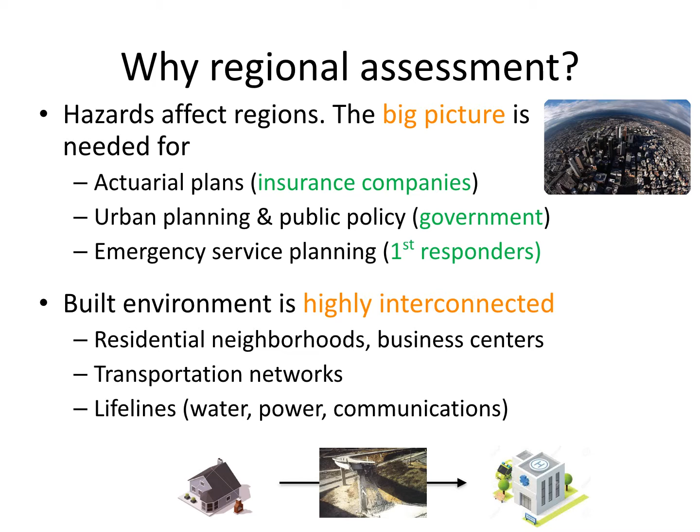Now that we've established the need for regional assessment, let us identify the challenges. The first class of challenges involve harvesting of data and the conversion of data to metadata and eventually into analysis models. This is a challenging task because sample population is diverse. In other words, not all bridges and buildings are the same. And this diversity requires the use of sophisticated and as of yet non-existent data harvesting tools. Another challenge is that access to detailed data may not be possible. This would then require estimation of missing data through techniques such as machine learning.

Finally, processing of harvested data and analyzing the resulting models require large computational resources. It is fair to state that regional PBSA studies will break computational records among civil engineering applications. The subsequent challenge involves transforming the models into decision variables such as economic loss estimates, downtime and repair costs, and insurance premiums. The challenges in this area include the necessity to use heterogeneous analysis tools and to link them.

In the present context, these tools include OpenSees for nonlinear structural analyses of models, OpenSHA to estimate the hazards, and FEMA's Performance Assessment Calculation Tool, PACT, to estimate the economic losses. New methodologies need to be brought in, including data analytics and Bayesian inference methods, to organize and make sense of the output of the analyses over the extremely large metadata sets.

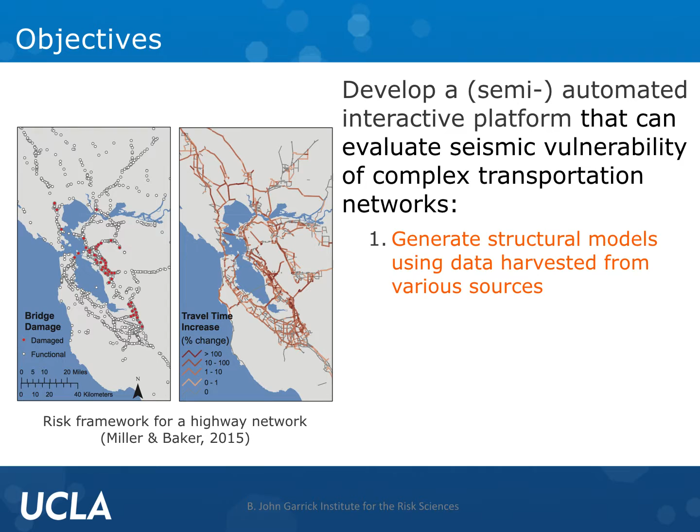Given the motivation and challenges cited before, the objective of the present effort is to develop a semi-automated interactive platform that can evaluate the seismic vulnerability of complex transportation networks. There are three distinct threads of features that such a platform should have. One, it has to be able to generate structural models. Two, it has to be able to carry site and structure-specific seismic analyses. And three, it has to be able to evaluate the consequent economic losses at the network level.

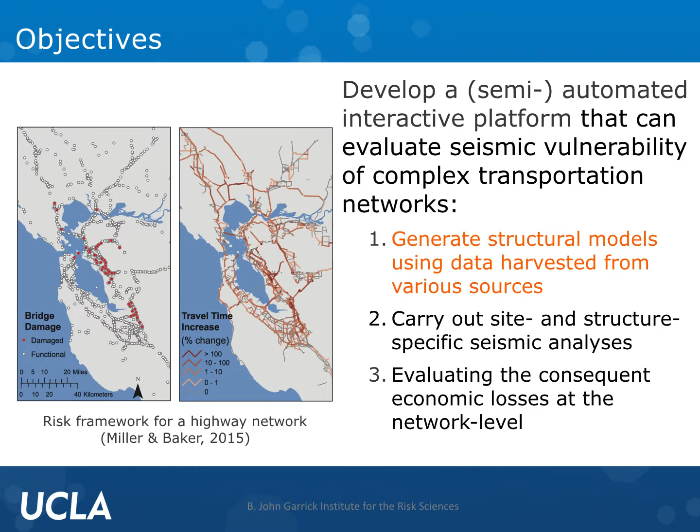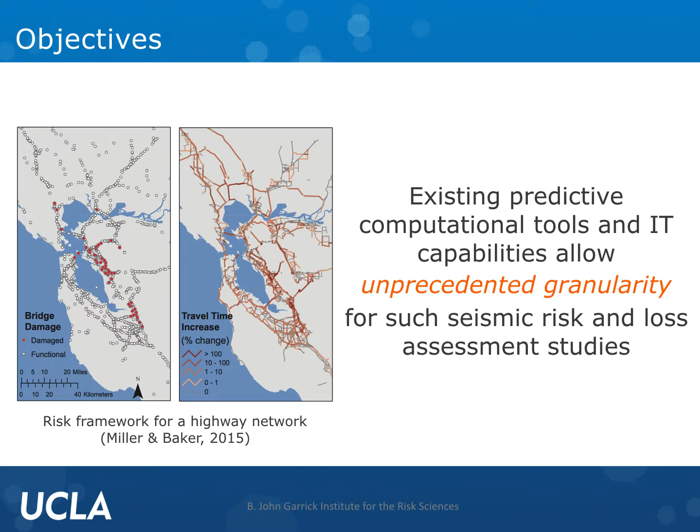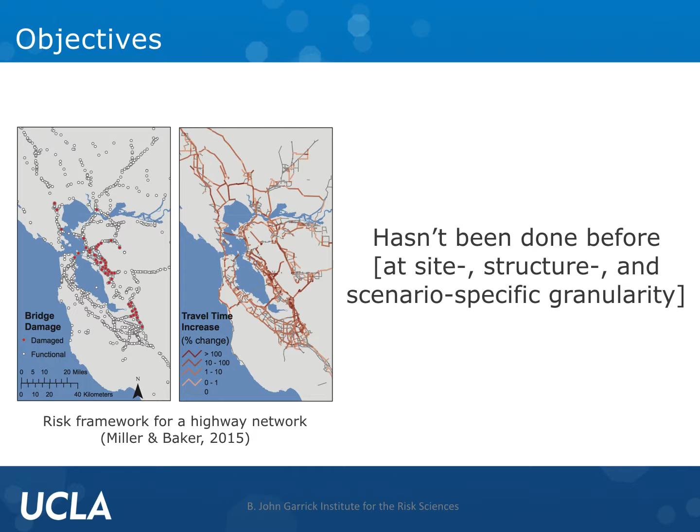Existing predictive computational tools and IT capabilities do allow unprecedented granularity for such seismic and loss assessment studies. Yes, the technologies and tools exist, and a few attempts have been made towards this goal, such as the study by Miller and Baker shown here on the left. However, the type of regional PBSA that we're aiming in our study, which features site, structure, and scenario-specific granularity, has not been achieved, nor even attempted before.

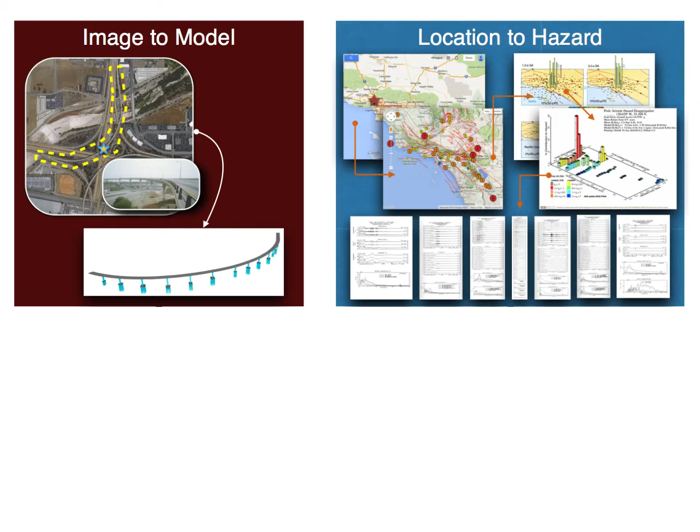So what is our vision and what is our scope? Here's a graphical illustration of the envisioned workflow for our regional PBSA methodology. We begin by developing an analysis model of a given bridge, for example, using images. We then devise a suite of representative ground motions for the specific site of our bridge.

We use the model and the ground motions in nonlinear time history analyses in order to develop a statistical picture of the potential outcomes in the form of, for example, fragility curves. These fragility curves can then be used to estimate the decision variables for assessment, such as economic losses, downtime, repair and retrofit costs, or insurance premiums.

We plan to carry out this workflow through a regional PBSA computational platform we're currently developing with my students at UCLA. The toolbox contains a module that harvests raw data, including images, from public databases and users, and converts them into metadata. These metadata are then stored and organized in a relational database.

Using the metadata, it is possible to create analysis models, and the analyses are carried out using several publicly available tools. OpenSHA is used to compile site-specific ground motions from databases such as PEER NGA-West2. OpenSees is used for carrying out the nonlinear time history analyses which yield the fragilities. And FEMA P-58 PACT is used to estimate the losses.

Once the site and structure-specific results are computed, they are committed back to the relational database so that they can be accessed by users, and also they can be used to learn about the common behavior of subclasses of bridges and components. This learning process can be used to eliminate unrealistic and non-physical results, and also to devise automated metadata for yet-to-be modeled new bridges for which only a few pieces of information are known, such as structure type, number of spans, and year built.

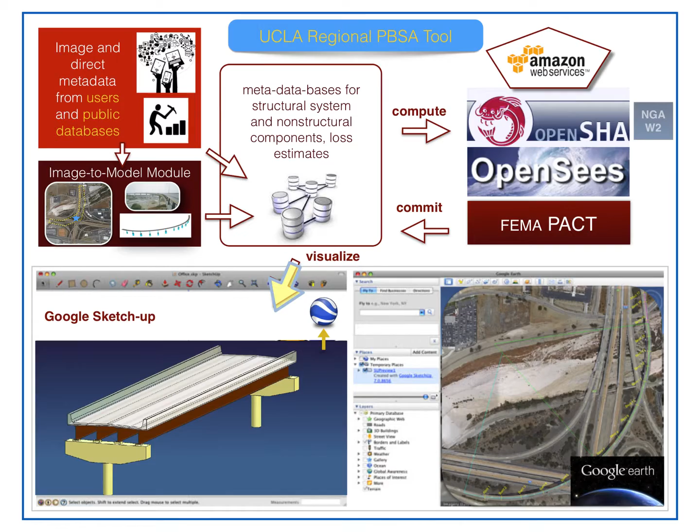Here are some of the details of the envisioned components for our PBSA framework. Let us begin by describing the image to model module. Let us in fact emphasize the fact that we will not only use images, but any viable available data to create the models required for our analysis.

So where will these data come from? A good portion of the data required to devise bridge models for analysis will come from databases. One such major database is the National Bridge Inventory, which is compiled by the Federal Highway Administration. This database provides metadata such as year built, construction type, and materials used for all bridges and tunnels in the United States. Its primary intent is to bookkeep bridge conditions.

Another major database is the Caltrans Bridge Database, which is compiled and maintained by the California Department of Transportation. It provides all details of bridges, including foundation configurations. This database contains mostly analog data in the form of structural drawings, and thus it cannot be interrogated automatically at the present time. Nevertheless, it can be used with permission from Caltrans to validate and categorize image-based models.

Another source is the California Strong Motion Instrumentation Program CSMIP database, which is maintained by the California Geological Survey. It provides structural and foundation details of 72 bridges in California. This database can be interrogated online, and it contains bridge response data from past earthquakes, which can be used for model validation. In our study thus far, we have already created computer codes that automatically extract all available information from the NBI and CSMIP databases.

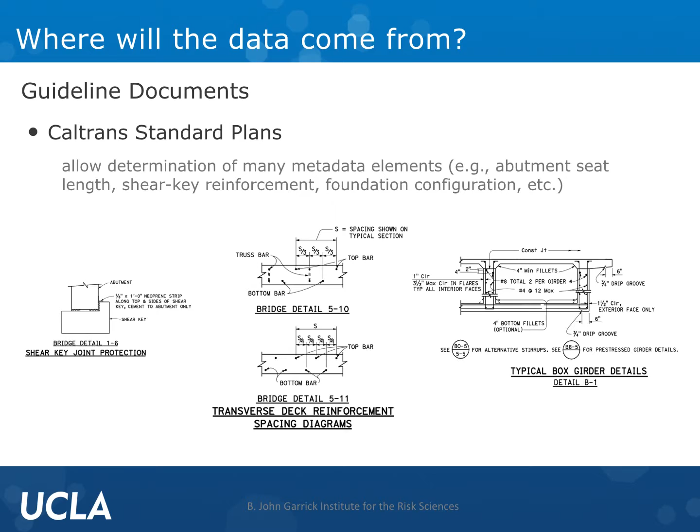Some of the data will come from existing guideline documents. Caltrans standard plans allow accurate estimation of several metadata elements, such as abutment seat length, shear key reinforcement details, box girder details, and foundation configurations, by using other harvested data such as number of spans, number of lanes, and year built. Our master's and PhD students are currently making progress on developing data mapping systems to estimate unknown metadata based on priors and data dependency rules that we're extracting from Caltrans standard plans.

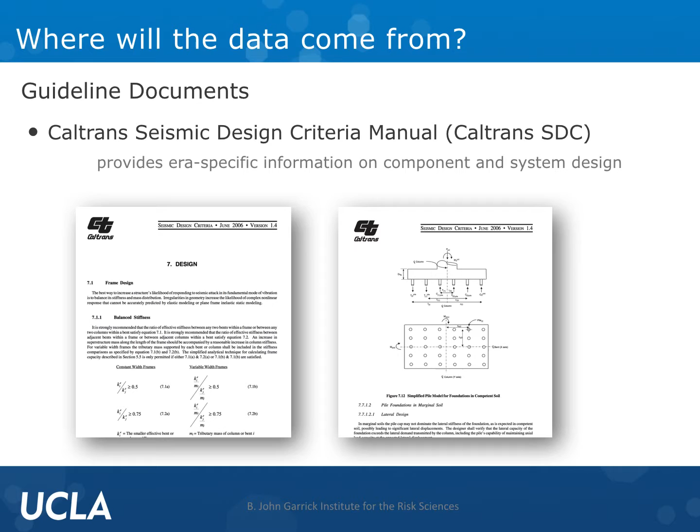Another similar and important source is the Caltrans Seismic Design Criteria Manual, or Caltrans SDC for short, which provides era-specific information on component as well as system design. Again, it is possible to extract metadata rules from Caltrans SDC and accurately estimate, for example, the column reinforcement ratios from other harvested data such as location, year built, number of spans, and number of columns.

A major source of our data will be the internet, and the primary providers of these data will be the navigation and GIS tools such as Google Maps, Google Earth, and MapQuest. All of these applications can be interrogated online to extract images as well as topographic data. I will describe how we use these databases to develop our geometry models later.

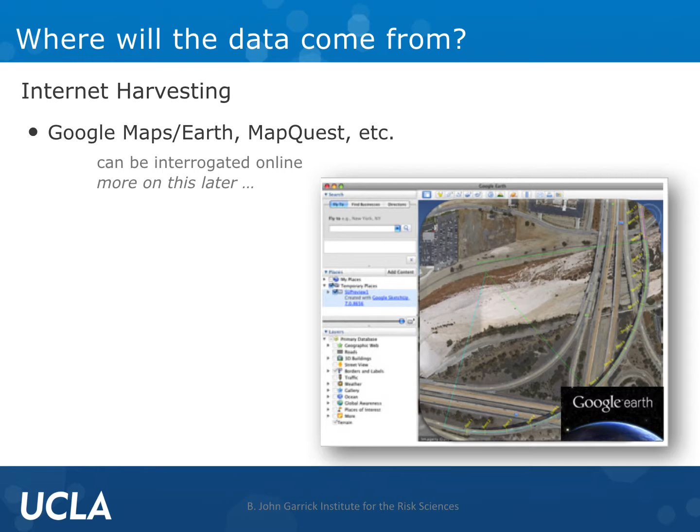Another major source of data will be the general public, i.e. the users and viewers of our regional PBSA tool. We will use crowdsourcing techniques to extract information when it is simply too difficult to devise a computer algorithm to do the same job. To increase the reliability of crowdsourced data, we're developing a Wikipedia-style interface for our data contributors. The collected data will be reviewed by referees whenever possible, as well as machine learning algorithms to eliminate nonsensical entries.

Here's an example of how crowdsourcing can be used. We can show a user what a typical seat-type abutment looks like. We then provide the user a photograph that shows the abutment of a particular bridge and ask if the user thinks that this is a seat-type abutment or an integral one.

Let us now move on to the specifics of how images can be processed. Development of an image-based model begins with locating a bridge and marking its abutments. We do this by a combination of automated and crowdsourced methods. We start by reading the approximate bridge coordinates from NBI. We then extract a satellite image of the location corresponding to the approximate bridge coordinates.

We run a road extraction algorithm to detect roads on the selected image, and then generate random points on detected continuous road lines and pass the coordinates to the Google Roads API. We then cross-check road inventory with NBI and then highlight the relevant road line. We then prompt the user to mark the beginning and end points of the bridge abutments.

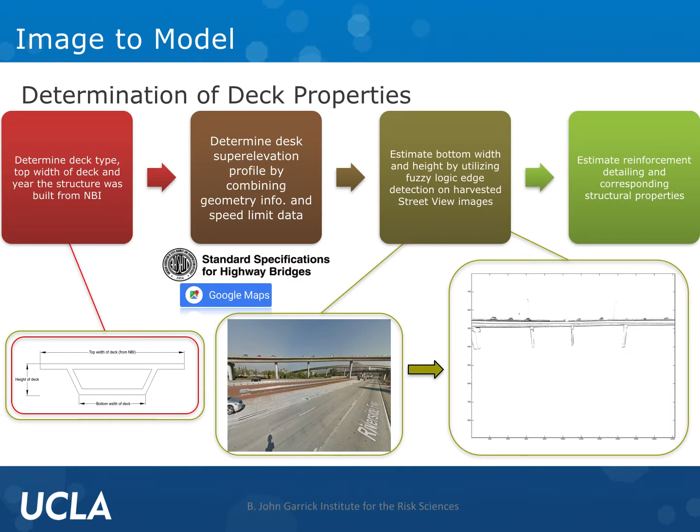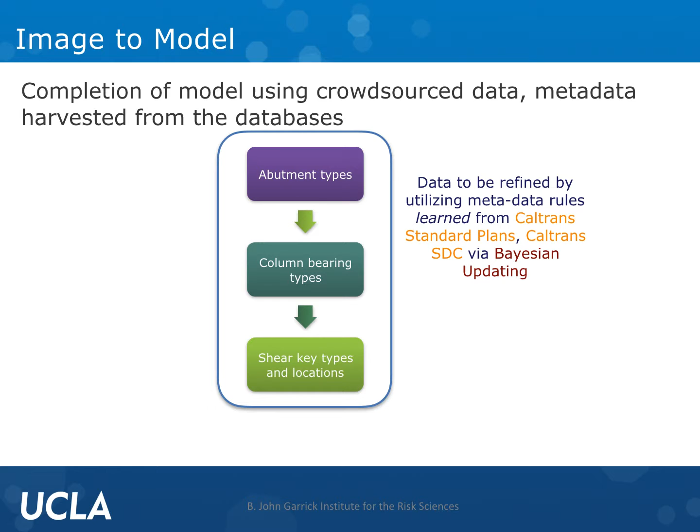Now, the bridge model can be completed using crowdsourced data as well as metadata harvested from the databases. This step will yield information on the types of abutments, column bearings, and shear keys. Refinements can also be made at this point by utilizing metadata rules learned from the Caltrans standard plans and Caltrans SDC using, for example, Bayesian inference techniques. These steps will ultimately yield a complete analysis model.

For regional PBSA, in addition to a viable analysis model, we need site-specific hazard data. This objective can be easily achieved by using various existing tools such as OpenSHA, which ultimately enable the compilation of a suite of representative ground motion time histories for a chosen level or intensity of hazard.

This compilation can be achieved in different ways, and in the ideal scenario, the ground motion time histories are produced by aggregating hazards from faults affecting the particular site, and by using state-of-the-art attenuation relationships that model ground motion propagation from the source to the site.

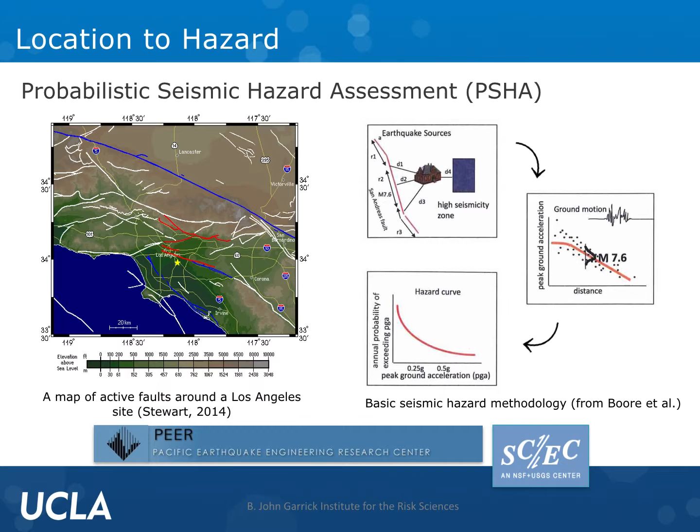OpenSHA and relevant ground motion databases had been developed through decades of coordinated research, which primarily took place at the Pacific Earthquake Engineering Research Center and the Southern California Earthquake Center. The present project is fully utilizing these tools and databases by interrogating them through the internet using properly devised scripts. With both the model and the hazard at hand, we can now carry out the analyses, extract the fragilities, and subsequently estimate the losses.

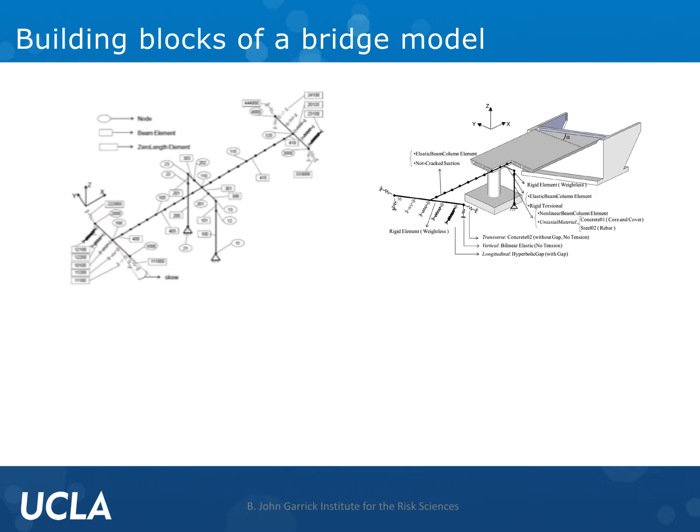So what does an analysis model comprise? In the analysis step, we'll make use of harvested metadata and create input files and scripts for the particular nonlinear time history analysis code that we will use, which is OpenSees. In the recent past and through nearly a decade of sustained research that involved several field tests, my group and several other colleagues in California and Washington State have devised state-of-the-art validated models for bridge subcomponents. These include models for piles, abutments, shear keys, in-span hinges, and columns.

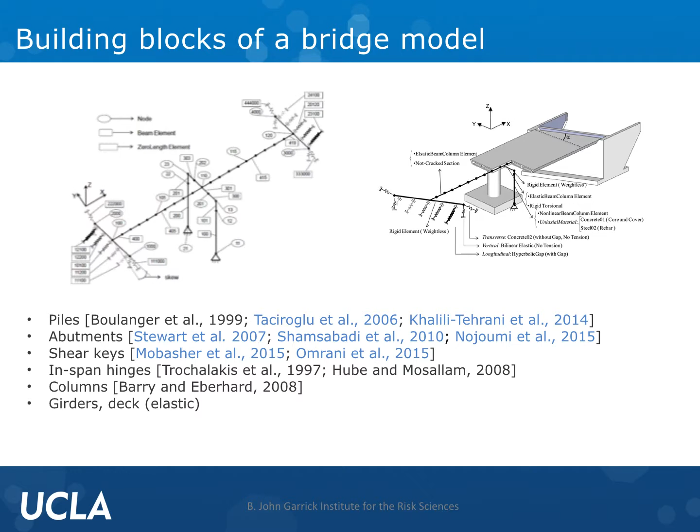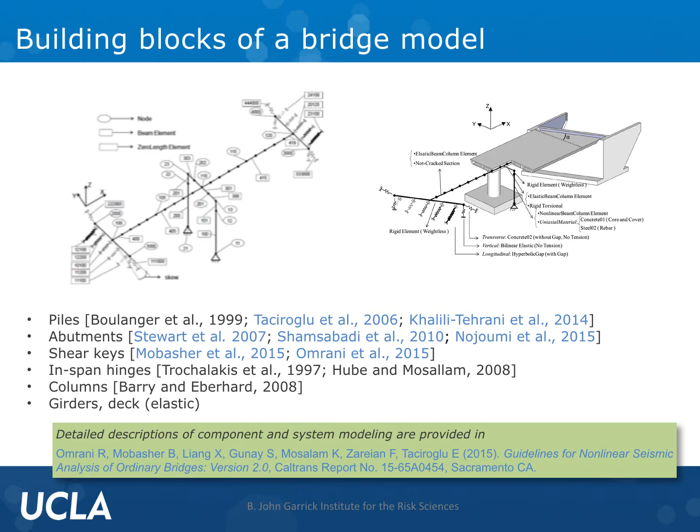The references in light blue are work from my group and collaborators. The culmination of these efforts are outlined in a recent report that we had submitted to Caltrans, which provides best bridge modeling practices for PBSA. This report and our experiences will inform the development of analysis models in the present project.

The aforementioned analyses are not only carried out using a suite of site-specific ground motions, but also using a model matrix of the particular bridge structure that brackets the uncertainty in the estimated model properties, such as reinforcing details, foundation types, as well as geometry. These analyses will require many simulations, and a basic approach for this is to use the Monte Carlo technique. Because each model under a specific ground motion can be analyzed independently, the computations can be easily carried out on a cloud service in parallel with near-perfect scalability.

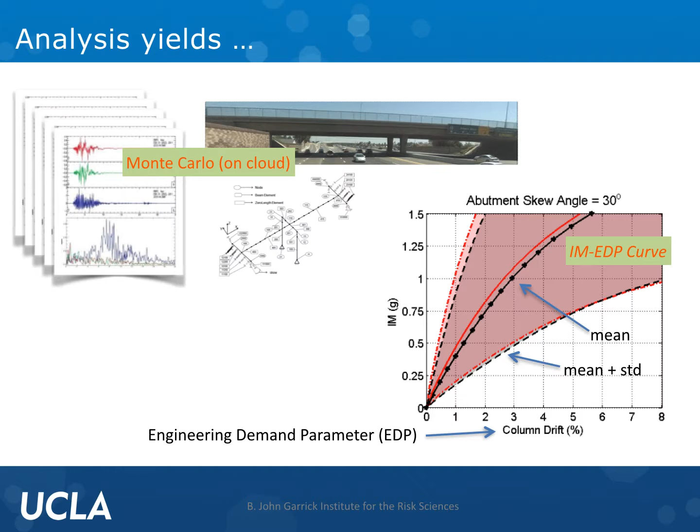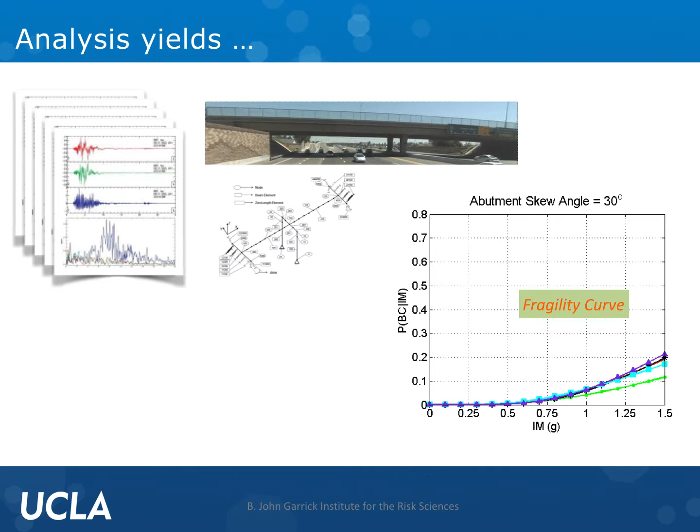The analyses will yield, among other things, the so-called IM-EDP curves, where IM denotes an intensity measure such as peak ground acceleration, and EDP is a response parameter such as column drift ratio. The uncertainties in these curves due to ground motion and model variabilities are captured as an inherent outcome of the Monte Carlo analyses. The analyses will also yield fragility curves, which denote the probability of exceedance of a predefined damage state given the ground motion intensity measure. For example, here we have computed the probability of collapse of a bridge that has skew-angled abutments.

The final, and arguably the most important ingredient in regional PBSA is loss estimation. Damage to a bridge leads to casualties and functional loss, which comprises direct losses such as repair costs and indirect losses such as downtime and casualties.

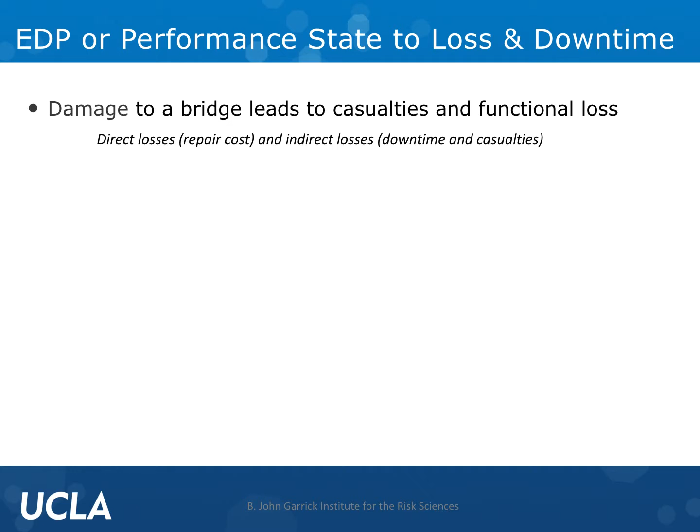Extensive research had been carried out for buildings, for example, to transform EDPs into direct and indirect losses. The results of these efforts have been packaged into the FEMA Performance Assessment Calculation Tool, PACT, which provides fragilities and consequence functions for structural as well as non-structural components and systems.

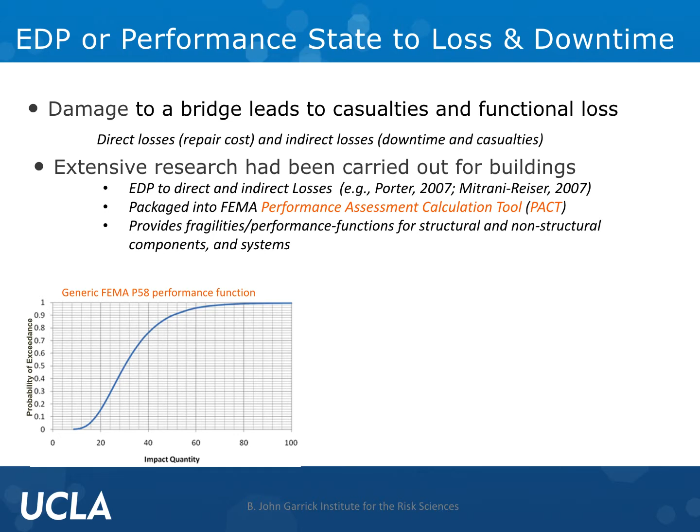In the graph, we're seeing a generic FEMA performance function. The vertical axis is a probability of exceedance function. For example, probability of the acceleration of the second floor of a hospital building exceeding 0.4 g. The horizontal axis is the impact quantity, for example, the repair costs of an MRI machine which happens to be located on that second floor.

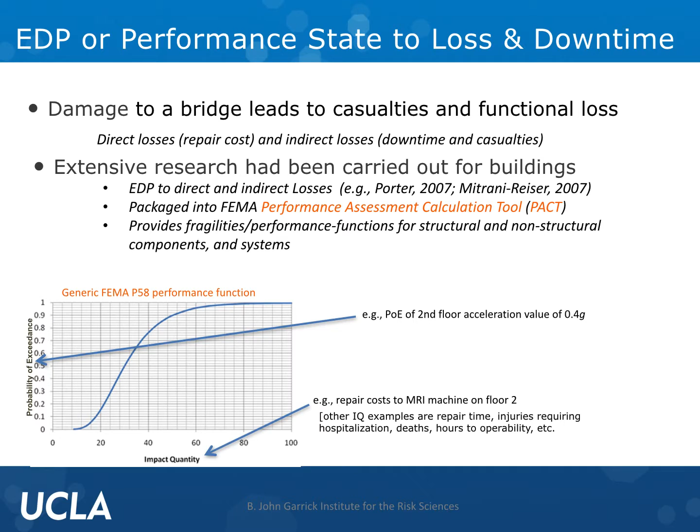While fragility and loss functions for structural and non-structural components of buildings are well represented in PACT, they're non-existent for bridges. Our long-term plans in this area include trying to replicate the FEMA methodology for bridges, devising apps and tools for computing component fragilities which enable rapid post-event assessment, compiling repair and downtime data and statistics in collaboration with Caltrans engineers, and devising methodologies for network impact and recovery analysis with economists and urban planning experts from UCLA's Luskin Center.

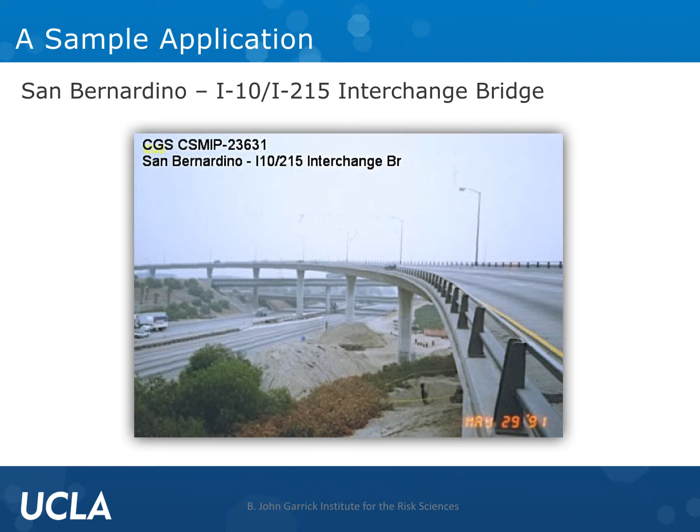The broad description of our proposed methodology is complete. I'd like to now give you a couple of application examples. The first example is the development of a geometric analysis model for the San Bernardino I-10-I-215 interchange bridge, which is also known as the Colton interchange. We have studied this particular bridge because we were provided with access to as-built structural plans for this particular bridge, which enabled us to validate our image-to-model toolbox.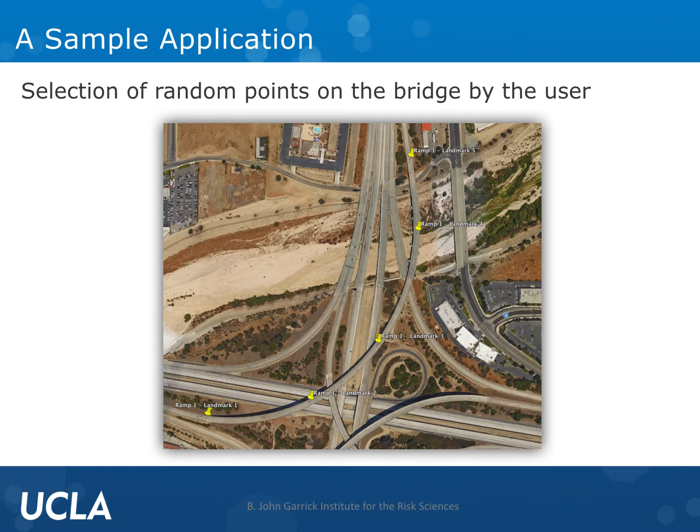Our automated road selection tool locates this bridge first by using the NBI data and highlights it so that a user can mark the abutments. The user can mark more than just 2 points, but only the outermost points on the highlighted route are used to delineate the bridge. By utilizing the user input, our program first calculates the curve corresponding to the bridge center line. This curve is typically sampled at 50 data points.

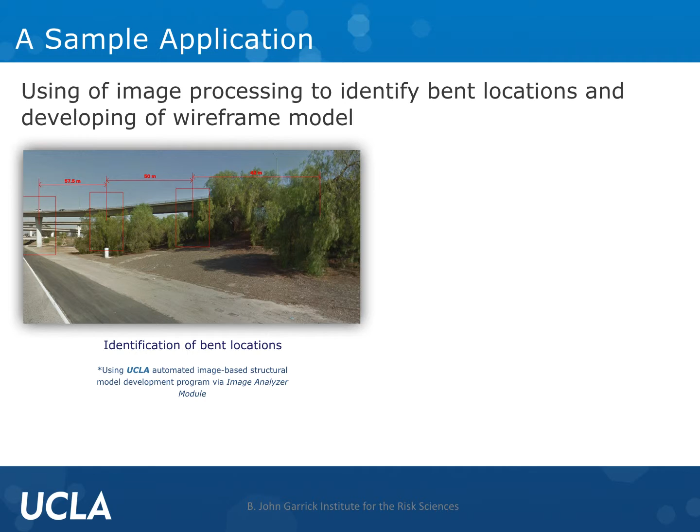Next, ground elevations and road elevations corresponding to each sampling point are harvested. Subsequently, the bridge center line data points and ground elevations are harvested using Google's road and elevation APIs respectively. And the road elevation data are collected through MapQuest elevation service. Our program then harvests Google Street View images associated with the selected bridge and automatically identifies the bridge bent locations. Once the bent locations are identified, the program automatically generates a wireframe model by utilizing the determined spine curve shape, elevation data, and the bent locations.

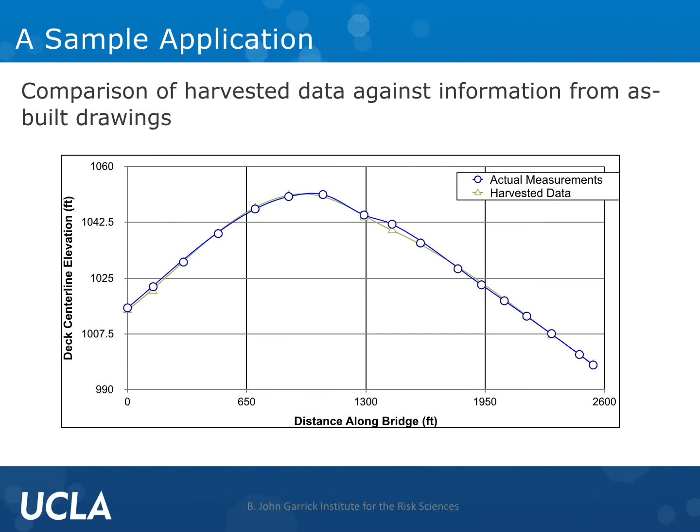Here's a comparison of actual measurements obtained from as-built drawings of the Colton interchange and the measurements automatically extracted by our image-based model generation tool. As seen, the accuracy is quite remarkable over the entire bridge. After the wireframe model, the program automatically identifies curves and spirals comprising the centerline geometry. By combining this information with speed limit data, the expected curve superelevation profile is determined.

The next step is to determine the dimensions of the detected columns. For this purpose, our program goes back to the pictures utilized for detecting the bent locations. And by using fuzzy logic membership functions, it compares the intensity of neighboring pixels to detect the column edges. Edge detection not only generates an outline of the column shapes, but also establishes the cross-sectional shapes of our columns. Columns with internal edges are assigned a rectangular shape, while column elements without internal edges are assigned a circular shape.

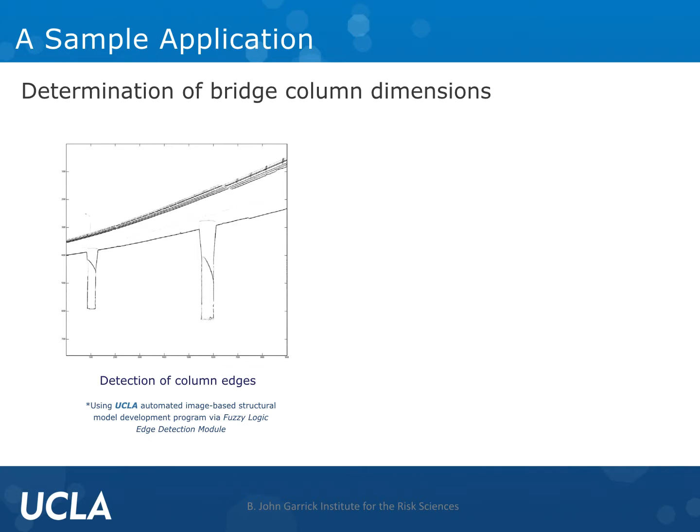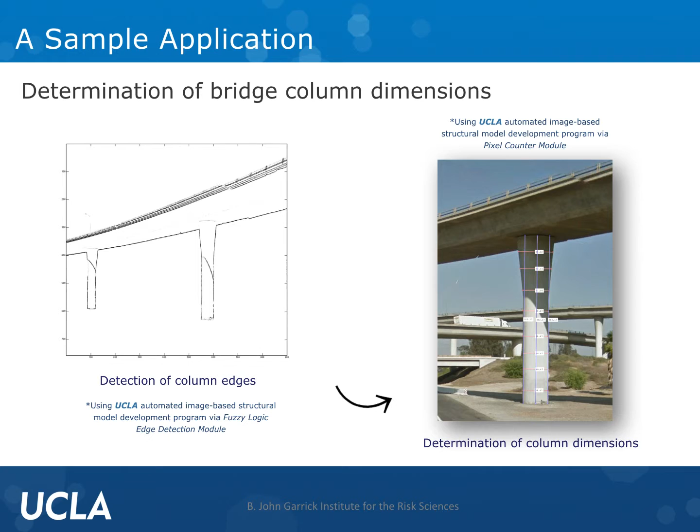Once the column edges are detected, our pixel counter module samples the height and width of each column at intervals. Subsequently, by comparing the average column heights in pixels to the column heights determined in the preceding steps, the column width profile is determined. In the example shown here, only a single pixel count process is depicted. In reality, our program evaluates each bent location from different viewing positions to establish a detailed data set.

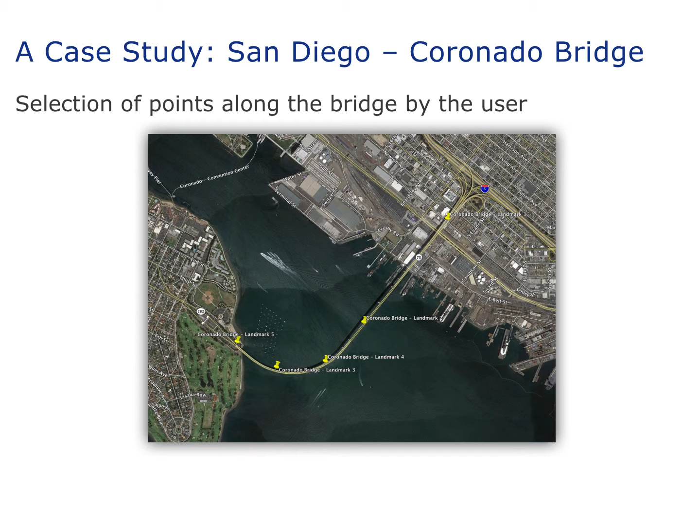Here's our second example, which is a water crossing bridge in San Diego Bay, which connects the Coronado Island to the mainland. The process for this bridge is the same. The bridge is marked first by a user. The road and below water ground elevations are extracted next. The images are harvested, bent locations and column dimensions are extracted, and the wireframe model is generated automatically within minutes. Unfortunately, we could not validate this model because Caltrans could not release the structural drawings due to security concerns.

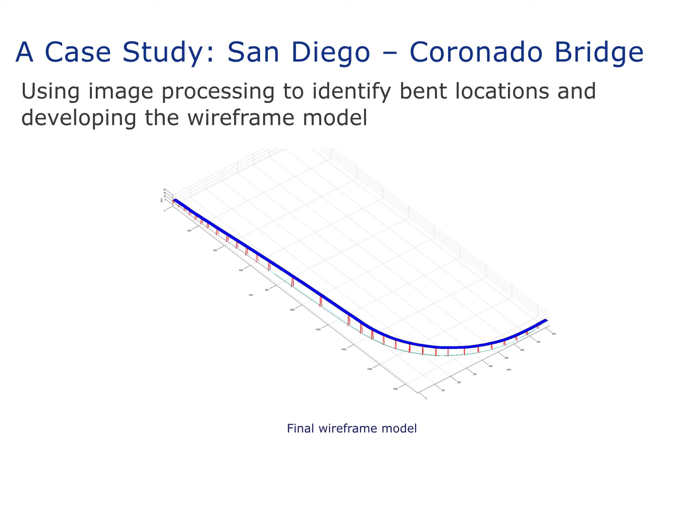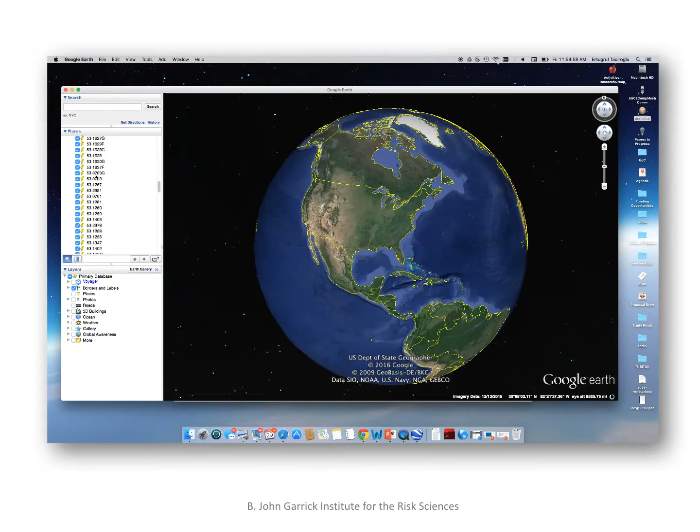We're currently in the process of applying our regional PBSA tool to a set of bridges on a testbed route. The said route is a 40-mile stretch of the Interstate 405 that connects the Port of Los Angeles to the San Fernando Valley. This portion of I-405 has 170 bridges, and we're developing analysis models for all of them for PBSA. We've already extracted their metadata from the NBI database, and we are in the process of extracting their geometries. This testbed study will allow us to debug our platform and validate its results.

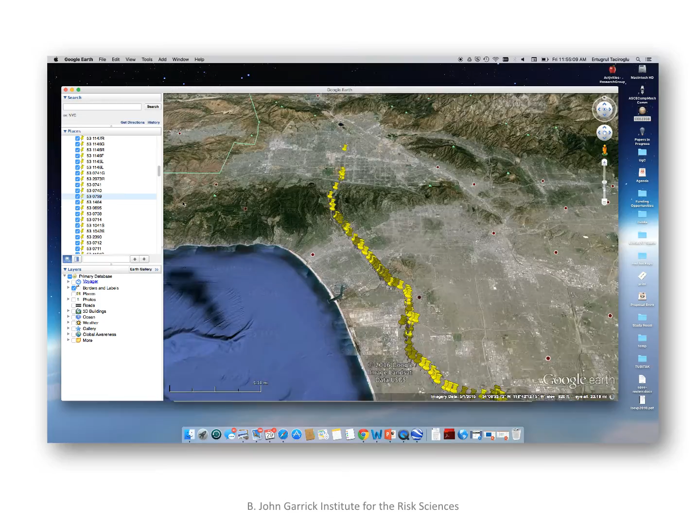By modeling a few of the testbed bridges from as-built Caltrans drawings, we will be able to determine how accurate the image-based analysis models can become. We anticipate concluding this phase of our project and presenting some of our results to the public by the end of fall 2016.

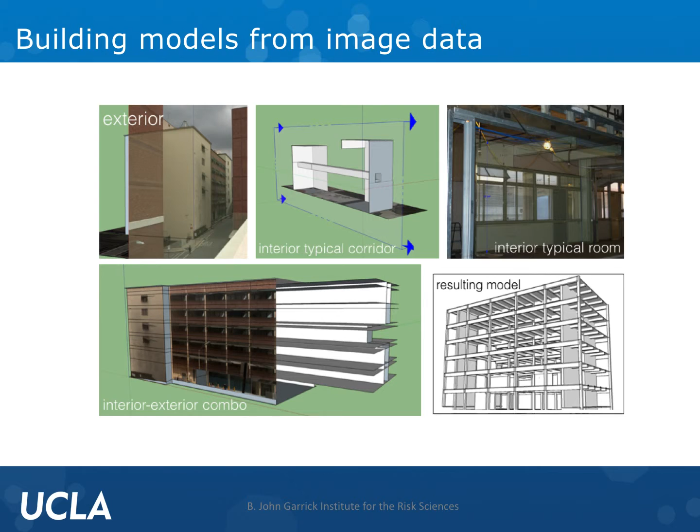I'd like to conclude my presentation by stating that in our group here at UCLA, we also have a fairly substantial effort directed towards the regional PBSA of buildings. Here's one of the buildings that we have developed an image-based model for, and we're currently focusing on multi-story reinforced concrete buildings. We have plans to extend this work to residential and commercial structures as well.